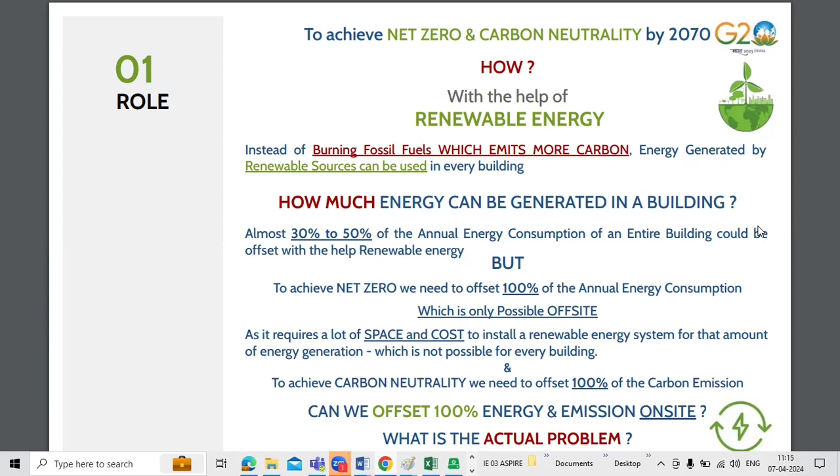To achieve carbon neutrality, we need to offset 100% of the carbon emission. Right, so achieving carbon neutrality means 100% of carbon emission needs to be offset. Can we offset 100%? Yes, we can offset 100%, but there are certain problems. And what are those problems? We can discuss that now.

Next. So how are buildings built today? There are n number of cases where architects have designed a building, and then somewhere during construction, the client or architect realizes, okay, let's go for green, let's go for green building technology, and then they intervene. They bring in green building consultants, asking to make this building a green building. This can be possible by using high performance systems or technologies.

But it is not possible to make that building a carbon neutral or carbon positive building, or a 100% carbon neutral building, because the systems alone can't help you make it net zero, though they will definitely reduce the energy consumption. But if the building envelope, the building roof, or the building orientation is poorly designed, automatically the energy demand is very high, and your energy consumption ends up being very high.

Say a building's EPI has gone from 100 to 150, and then you offset 80 - that's not a big deal. If you've designed a 100 EPI building and offset 80, that makes a huge difference. But if you've designed a bad building with EPI of 150, and you offset 70 or 80, that's not really the green approach.

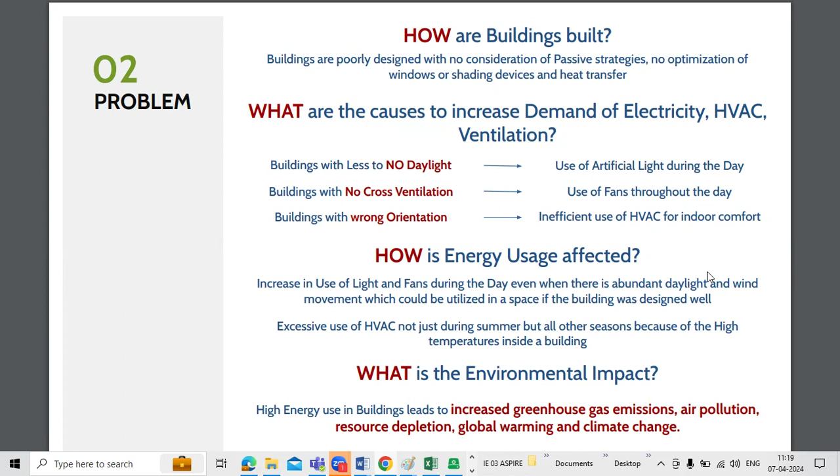Next, the solutions - there are very simple solutions which are graphically represented here, that can be easily introduced into the architectural design by an architect. But right now on this platform, I'm sure almost 90%, 95% of the audience are engineers.

So I will request you all - if you are working on any project, you should demand your architect that you need to go for passive design strategies first, and then let's optimize the energy and the systems. That will save a lot on sizing of the system as well as costing of the system.

So how should the building be designed to enhance the architectural design approach, by using passive architecture features? One extremely important factor is the orientation of the building. In our climatic context, the north and south surfaces receive very little radiation.

Whatever radiation falls on the north and south can be easily tackled through shading devices. However, the east and west facades are extremely difficult to tackle with solar radiation. Optimizing shading devices is also difficult on east and west facades, and the quantum of heat coming from east and west is also very high. So the orientation of the building itself plays a major role.

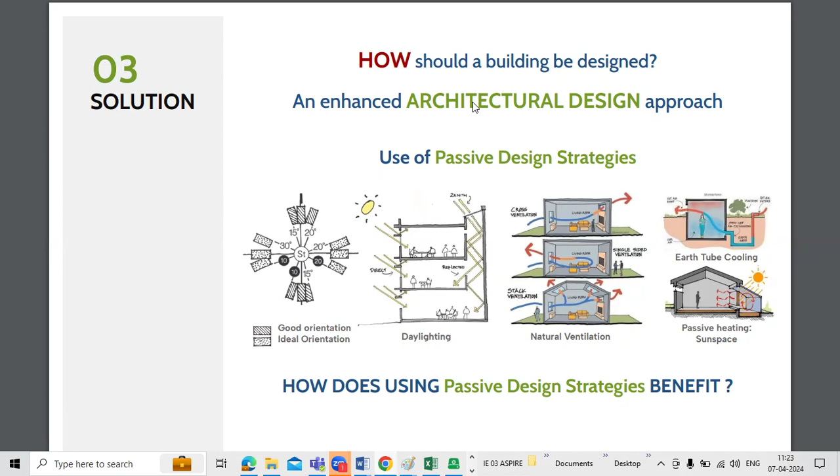And the passive heating and cooling systems, that's what we will talk about. That's the only approach to reduce your building energy demand 100%, by using passive strategies such as earth tube cooling systems and stack ventilation. Such strategies can be easily introduced.

So this is what we have already discussed - the building orientation, which refers to positioning of the site and considering the vegetation and the surrounding buildings. Surrounding buildings will also help you optimize the energy consumption. Second is the daylighting, what we have talked about.

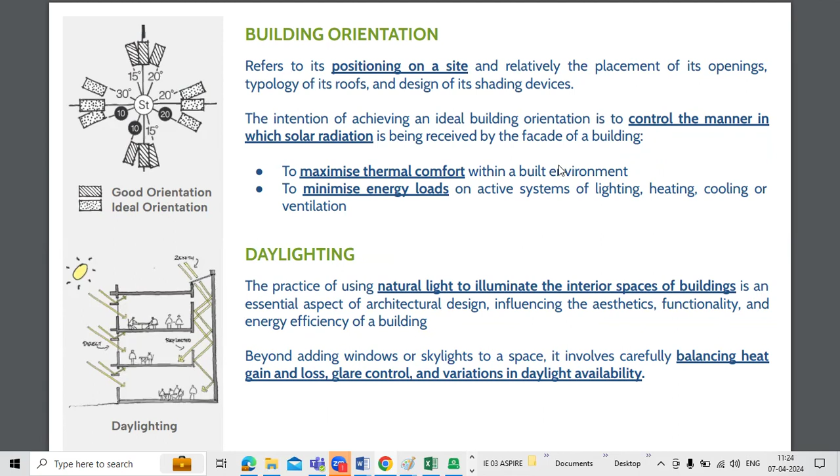Next, naturally ventilated we talked about, and then the passive heating and cooling system. This will play a major role because the word 'passive', that is naturally, uses the basic science of heat transfer, what we have learned in the smaller classes right from 7th, 8th standard. The principle of heat transfer plays a major role in meeting passive architectural buildings.

And I'm sadly saying this, that there is no syllabus of heat transfer in all our 5 years of architecture curriculum - we don't have heat transfer sessions in any of the subjects. I believe this is the most important thing for an architecture student to understand, at least with respect to ventilation, so that an architect can also reduce completely the energy demand of the building.

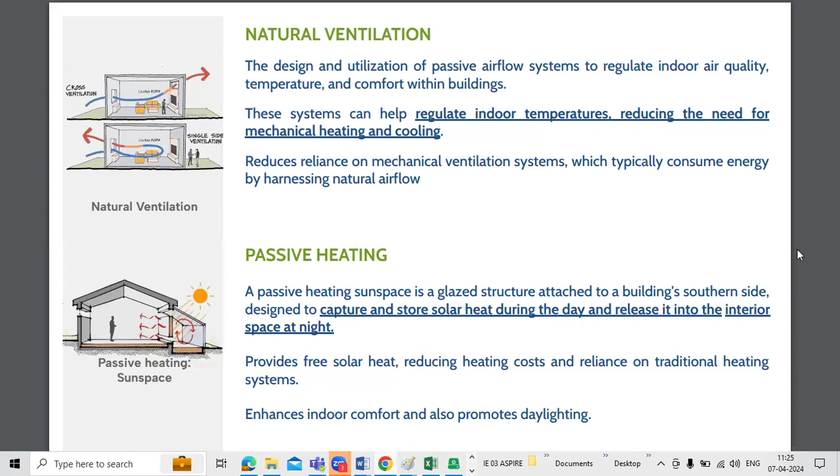So we talked about stack ventilation. This also plays a major role based on science. Stack ventilation is basically to remove all the hot air from your spaces. What we learned in seventh grade is that hot air rises up because of lesser density, and the cold air sinks.

Stack ventilation is nothing but a high level chimney from where you can remove all the hot air from your spaces, with the natural draft of cool breeze coming from the lower height windows. This is a creation of draft, and it works even where there's no breeze, an absolutely calm condition - stack ventilation will help create that draft of air inside your spaces. Just by understanding the basic principle of heat transfer, you can change entire spaces very positively.

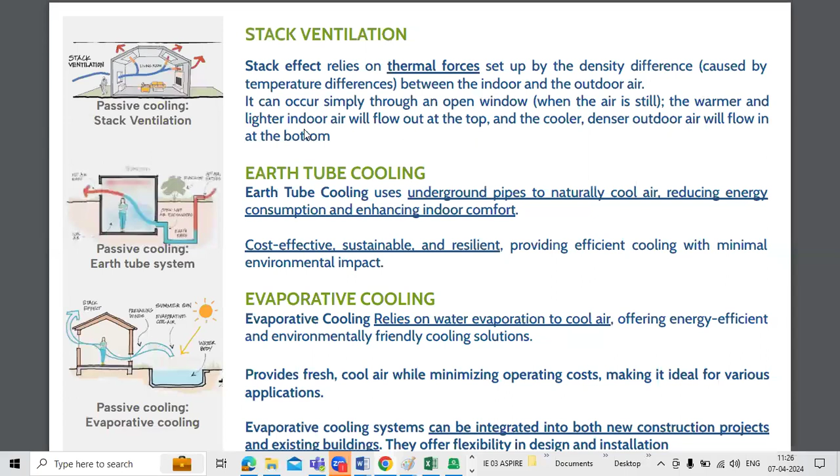Earth tube cooling system we will talk about in detail. Evaporative cooling system is also something we will discuss in detail.

Material selection - the building materials. I believe an extremely important part of any building design is the envelope of the building, which has walls, roof, and glass. These are the three major materials that most people really don't bother about. I'm sadly saying that 95% of architecture people practicing are all fascinated about the aesthetics and looks of the building, which is not wrong.

But if we add a little bit of science to it - again the principle of heat transfer, what material we are using, in what climatic condition, the site context - if we connect all these three things, then the building will run phenomenally. Because reducing heat transfer through the building envelope will help reduce directly 50 to 60% of your building energy demand. It reduces your building heat gain and directly reduces your cooling or heating demand.

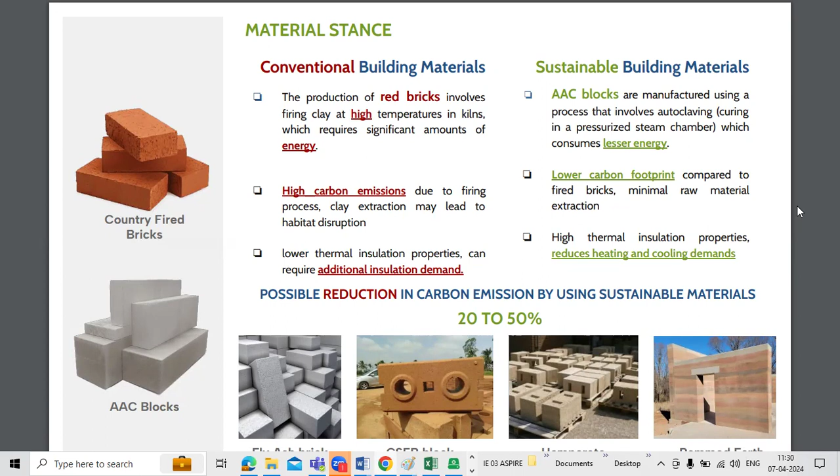Next. So what is the difference between a generally architectural practice design building and a passive architectural building? We can compare these two things.

The first one is the conventional building, let's say, relying heavily on mechanical heating and cooling systems. This conventional building directly has a huge dependency on the mechanical heating and cooling system. If it fails, the people in a glass building can't survive.

Just imagine a glass cube building in any Pune or Mumbai BKC area. The air conditioning system fails for 2 days. So the building won't run, it will completely shut. However, if you have a passively designed building, it doesn't require an air conditioning system.

So there is no such situation where the building may have to shut down for 2 or 3 days. The passively designed building will directly reduce your mechanical energy system sizing as well as the energy consumption. The second one is low performance windows, which contribute to heat loss in winters and heat gain in the building.

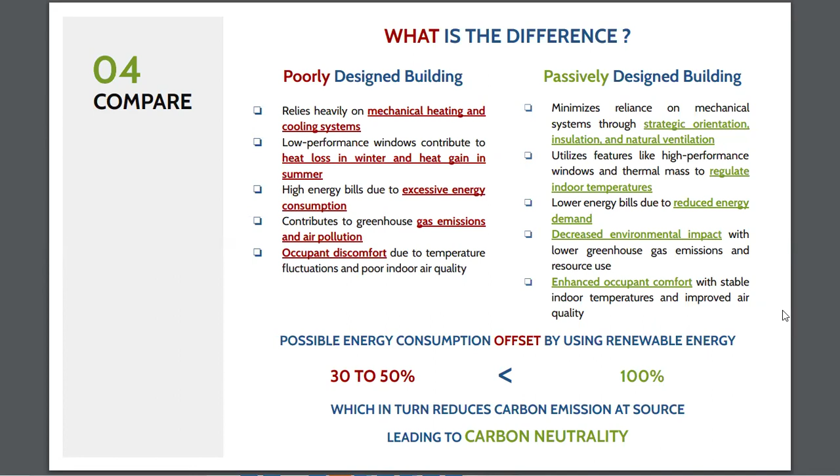Next. So, carbon negative.

There are steps to carbon negative. First there will be carbon neutral, then net zero, and then the carbon negative building. The approach to carbon negativity: step one is to be carbon neutral, where CO2 emissions from the built environment are completely absorbed by trees and plantation. Second, cutting down CO2 emission from burning fossil fuel by using renewable energy sources. Third, since CO2 emission is cut down, the CO2 absorption exceeds the generation rate. So if you are offsetting 100% of CO2 emissions, then the carbon negative building can be possible. These are the three ways which we will discuss in detail now.

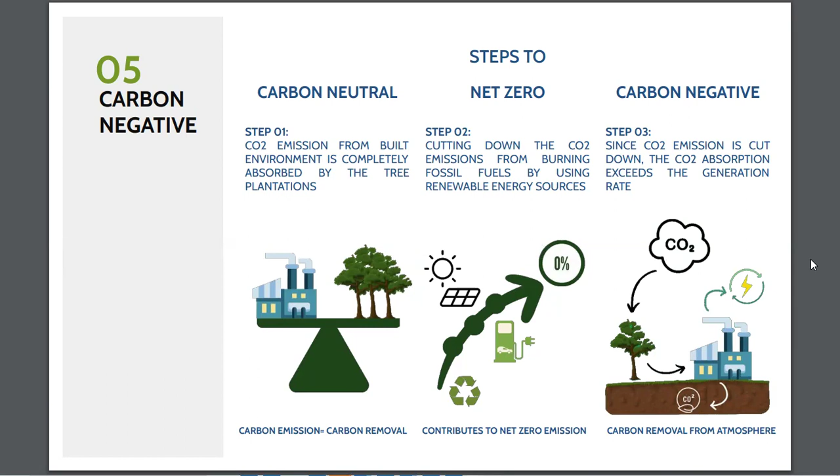Benefits: there are environmental, economical, and social benefits. Environmentally, you can reduce the CO2 emission, conserve natural resources, and mitigation of climate change can also be optimized or reduced by having such an approach.

Economical benefit: it reduces your energy bills and increases property value. If you are staying in a green building or carbon neutral building, the market value or prestige of that particular project boosts up, which helps builders increase the cost per square foot of that property. There's also potential for government incentives and rebates. The government has tremendous schemes and facilities for such buildings, which help get maximum benefits, rebates, and property tax benefits. You can save a lot on money.

And there are social benefits. It improves indoor air quality, enhances occupant comfort, and promotes sustainable living practices, which also helps maintain harmony in society. So these are the three benefits of carbon neutral building: environmental, economical, and social benefits.

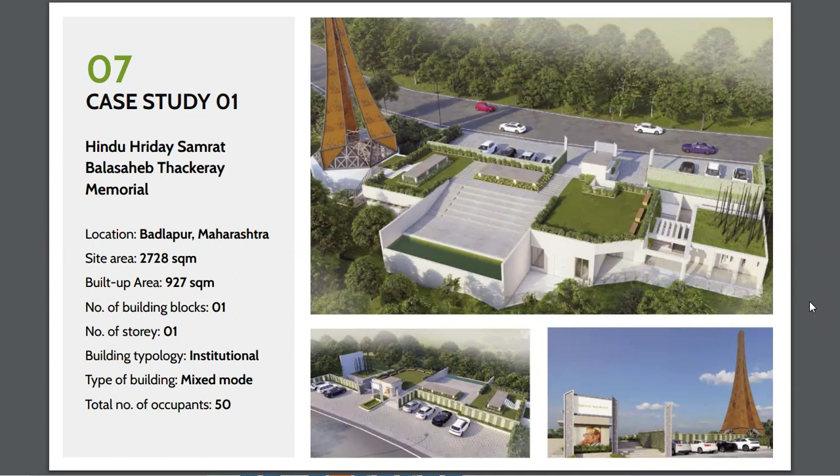The memorial's three towers symbolize the Shiv Sena and Balasaheb Thackeray's thoughts, with a different logic to it. Below the dome is a space for worship, where we have a 1:1 scale idol of Balasaheb Thackeray, beneath that dome and the three columns.

Next. If you can see the previous one, ma'am.

If you can see this, the structure is very small, whereas the gray shows the contours we have made, with smaller pathways across the entire contours, and a good amount of plantation has been done. There was a small, extremely small perennial stream flowing throughout all 12 months.

For so many years, the water was just flowing through the site into the Nala next to it. But now we have introduced three small check dams — you can see these three reservoirs marked here — which help.

These slow down the flow of water and help it percolate into the earth, while the same stored water is also used for the irrigation system across the entire 25 acres.

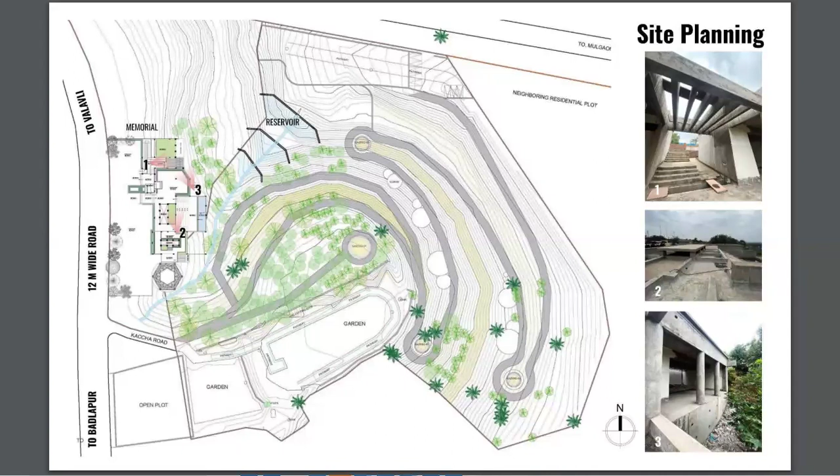That's not sufficient, but whatever water is available, we use it for irrigation. It's a matter of two to three years — once the trees mature and become self-sustainable for their own water demand, we won't need to water them. We're almost at that stage now, completing nearly three years on this tree plantation project.

So water now features as it flows through three steps, and what we're introducing now are completely lotus ponds — we are planting lotus in these three ponds.

On the previous slide, if you see image number 4 in the top right corner, you can see the site completely green, with the structure merged into the surrounding trees. Image 5 shows the entry to the building. The buildings below, which are 7-8 stories, are below your eye level, so the structure sits at a very high level.

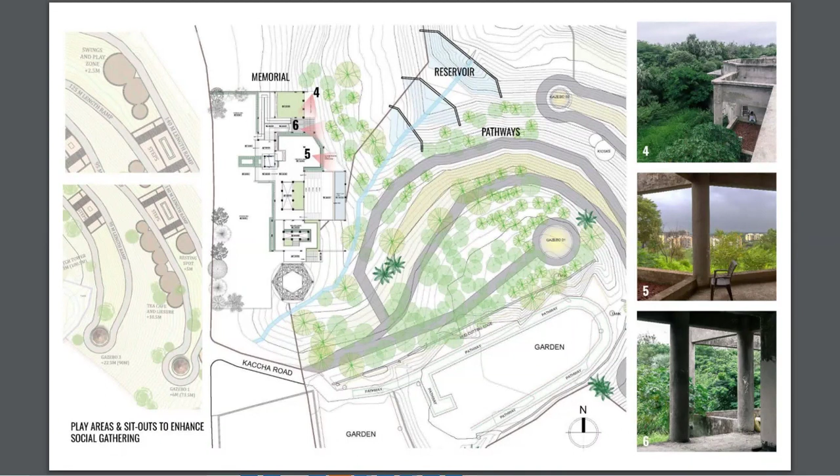In the section, you can see the structure is completely earth-bermed, and the use of contours plays an extreme role without cutting any trees. This use of contours helps meet all the passive design requirements, reducing heat while staying in harmony with nature.

We have also introduced small skylights in the art galleries. In the section, there are two skylights that bring in diffuse daylighting from the sideways rather than from the horizontal surface. We've included pictures of those rooms in the coming slides.

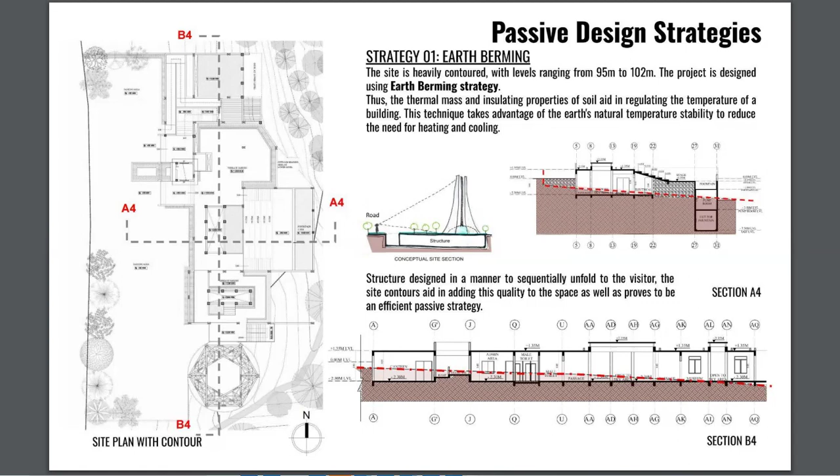This section shows the light coming inside, shown in yellow. The light comes from the skylights, which are side lights from the roof.

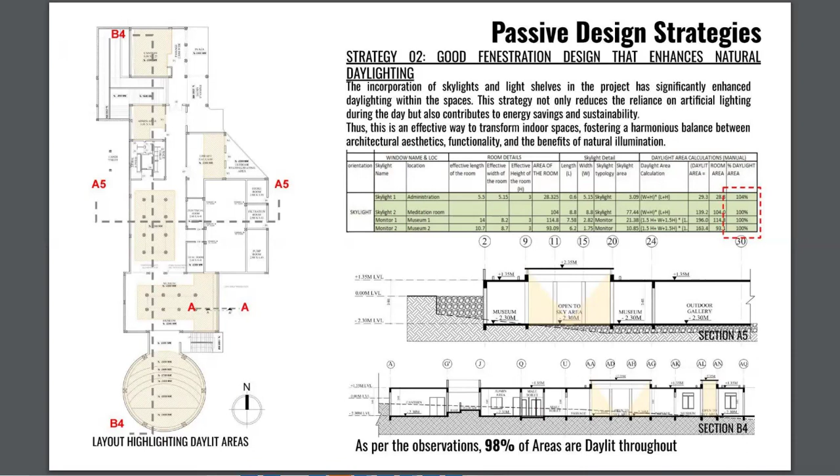Right now, without the light shelf, the light doesn't even reach 40% of the room, but we're in the process of installing the light shelf, which reflects and bounces light toward the deeper spaces of the room. Such small strategies help reduce energy demand.

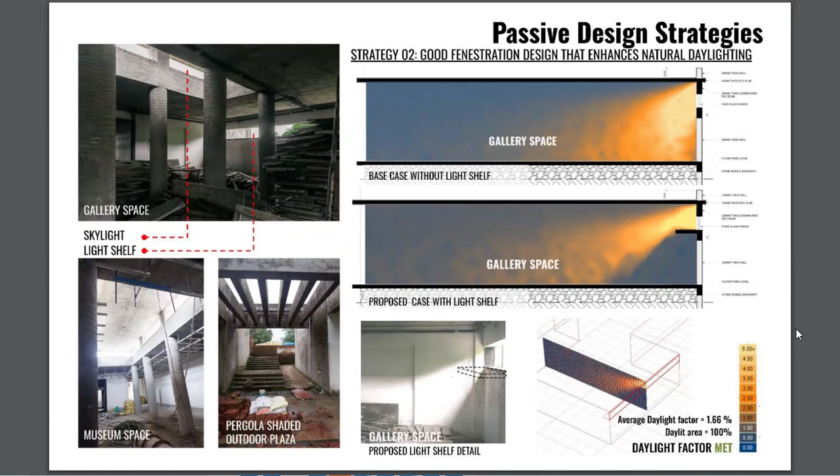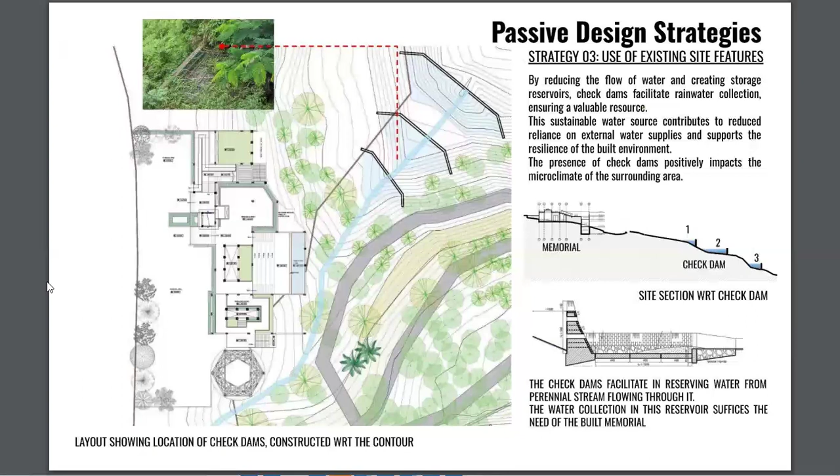Energy efficiency, yes, we have used the LED system and cassette air conditioning system for the space because of the small scale of the project. We have used cassette system for all the spaces which are art galleries, libraries, office spaces, canteen, and the prayer hall, and there's a small AV room as well.

With the help of the design itself, we have reduced almost 66% of the heat gain just by correct placement of the structure as well as by doing earth berming. We have reduced 66% of heat gain, and also 66% of the energy consumption from the base case has been reduced by using renewable energy as well as proper efficient systems.

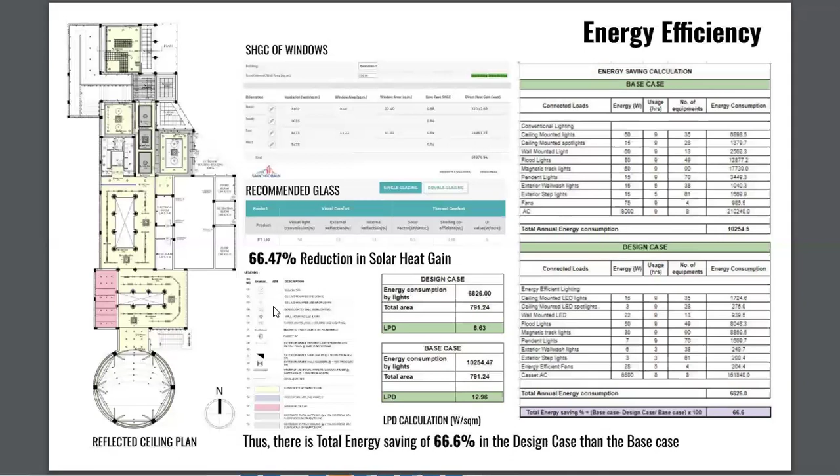As per GRIHA requirements, we are using 2 kilowatts of solar panels towards the northern side of the site. We have placed the solar panel there because on the south side we have a tower, so we don't want to cast a shadow on the panels. So we placed the panels towards the north side, facing the southern slope. This installation of solar panels is reducing our demand by almost 98-99% of the building demand.

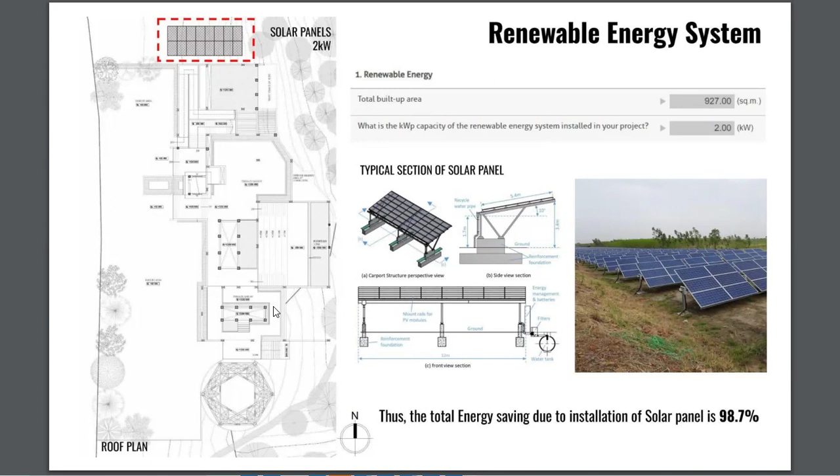We inverted the beams so that we can reduce the cost of the false ceiling and reduce the height of the building needed. So what we did, we inverted all the beams, and to maintain the waterproofing for the landscape and everything, we put in inverted earthen pots, then filled with AAC blocks, then screeded with cement, and the flat roof is achieved. So we have an air cavity in between the roof section itself.

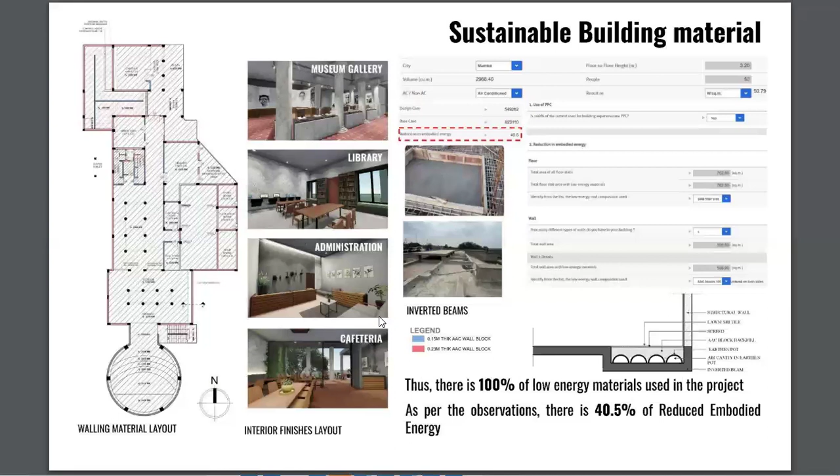Water, yes, we have the stream itself. All the low flow fixtures are used in the building. STP has been introduced, but we are not recycling and reusing that water because we are meeting the demand of the building, and it is not financially viable to use STP for such a small building where we are not generating a handsome amount of water to run the STP.

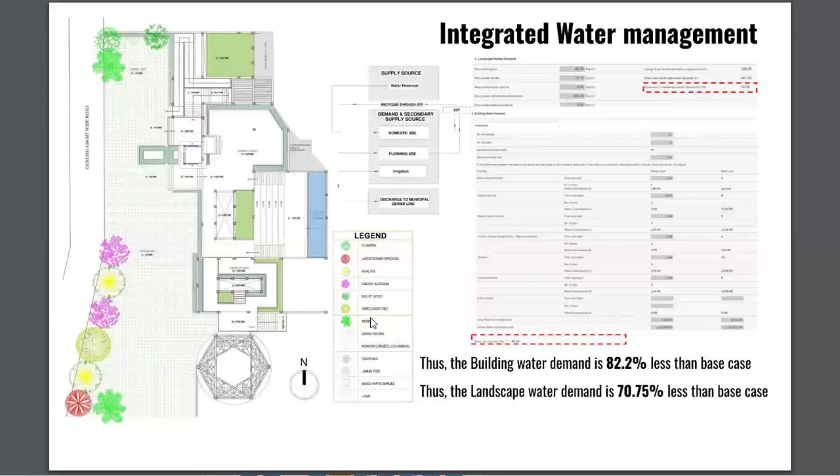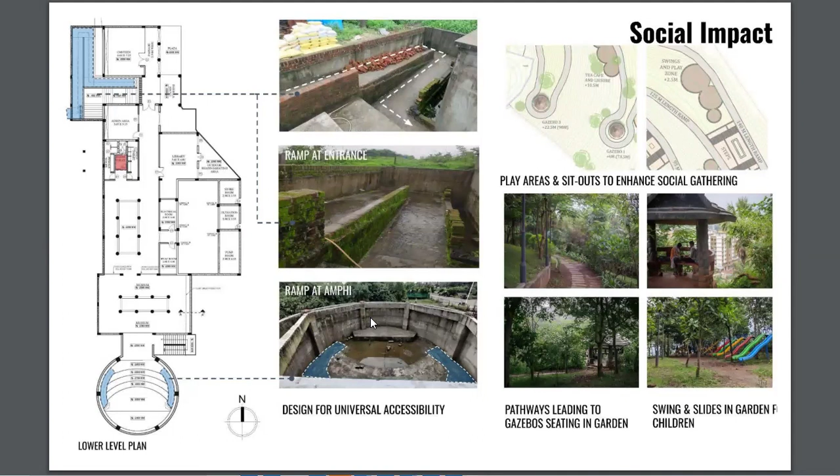Socially, yes, we need to think about the social parameters as well. So for people who are differently abled, we have all the ramps provided to reach all the spaces. Then we have toilets for differently abled people. We have gazebos for small kids, a garden area, gazebos for senior citizens, and a pathway which is completely without any step, so senior citizens can directly walk, or a wheelchair can also go on. These are the small initiatives we had taken.

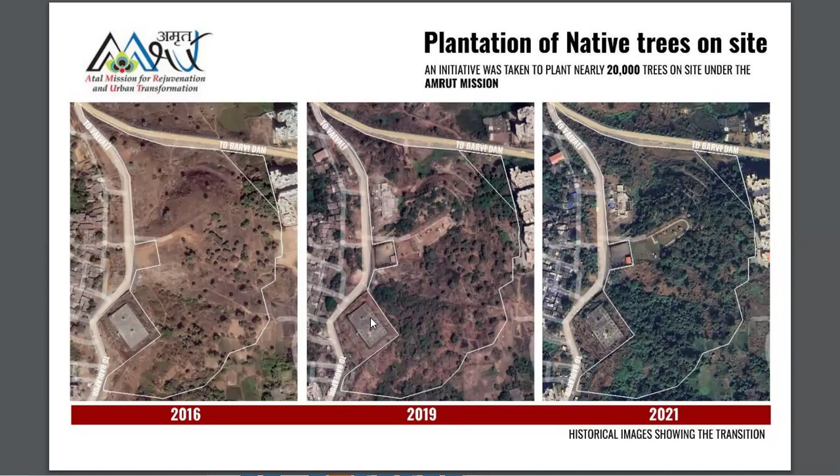Under the AMRUT mission, we planted 20,000 local native trees, which attract birds and different insects. So the whole biodiversity has been created, and this just happened without any specific thought process at first. We just thought we needed to introduce more trees, and make this like a breathing lung for the city, which gives a good amount of oxygen. But then for the competition purpose, we thought of calculating the CO2 emission done by the building and the oxygen produced by the trees.

What we have achieved is that we are producing almost one-fifth of the carbon emission and almost six times more oxygen. The entire calculation I've done shows we have achieved six times - so 100% of carbon emission is absorbed, and six times the oxygen is being produced. That's what we have achieved in this building by planting so many trees.

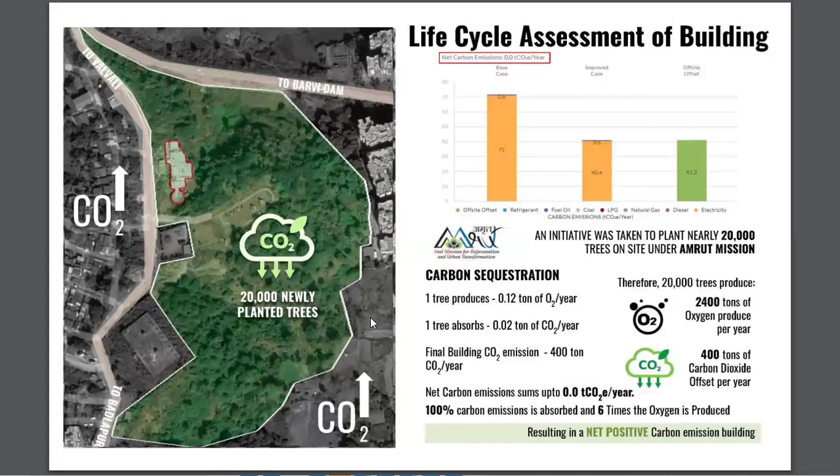So this building is carbon neutral because the trees we have planted are absorbing 100% of the CO2 and producing more oxygen than what the building is producing as CO2. This happened just because of the space available and the efficient use of that space.

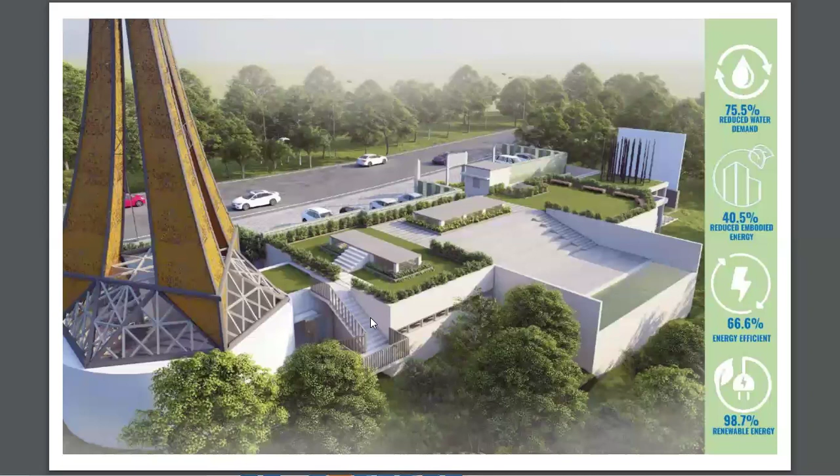It wasn't just the architect's thought - even the bureaucrats and the local authority, all the COs, everyone was very keen to have this project at a national level. This project got the national award last year at the GRIHA Summit as the best passive architectural design among almost 100 entries - 78 or 100 entries were there. Among all those entries, this building got first place.

Just hold on, I need to plug in my charger.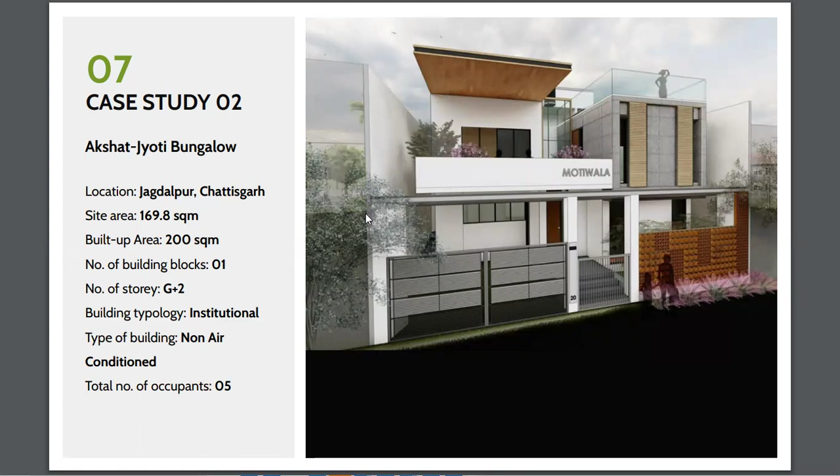The orientation of the building, as I mentioned earlier, plays a major role. The building is oriented as per the site context, with most of the windows facing north, and east is the main facade. We have very small slit windows punctured inside box windows, and the major part of the east facade is covered with the car parking, porch and buffer spaces. On the north side, there is a skylight and two turbo fans. That's how the entire structure has been oriented.

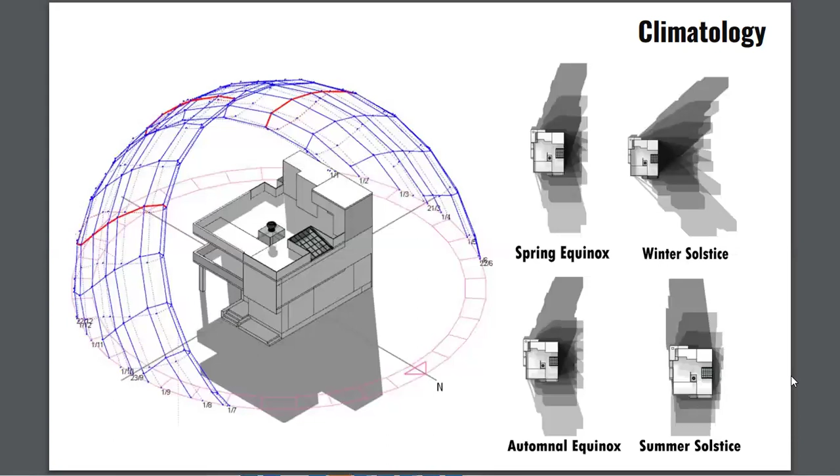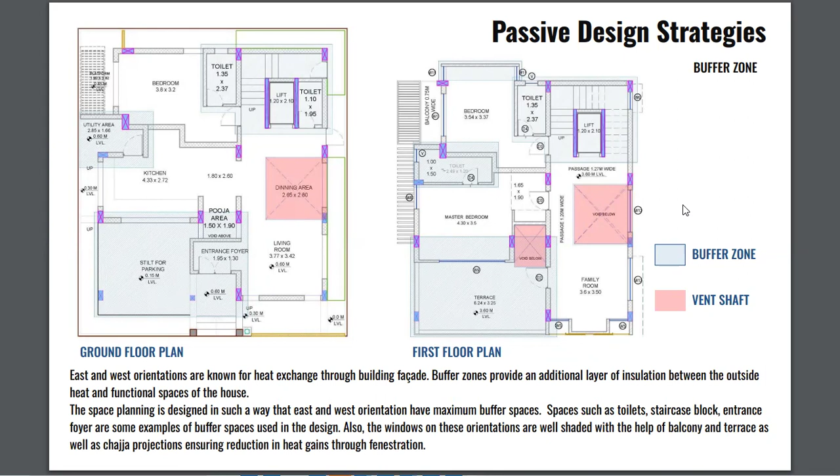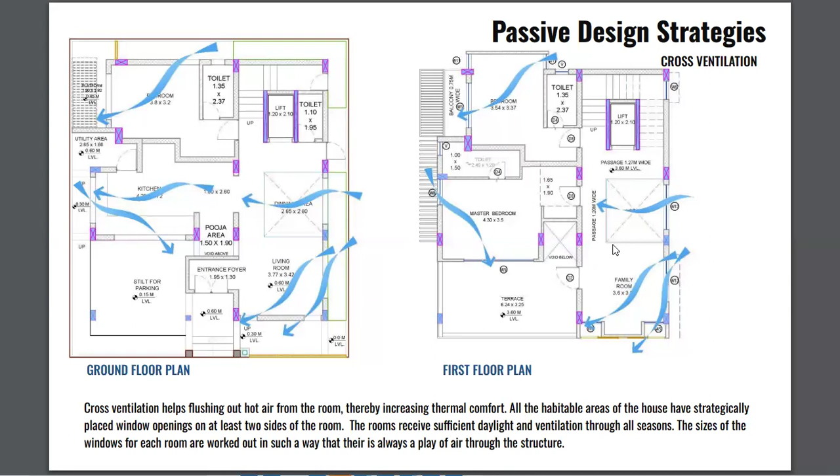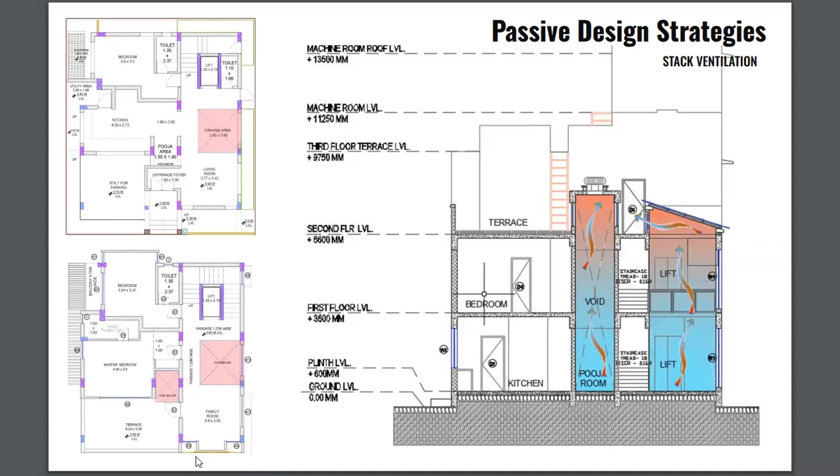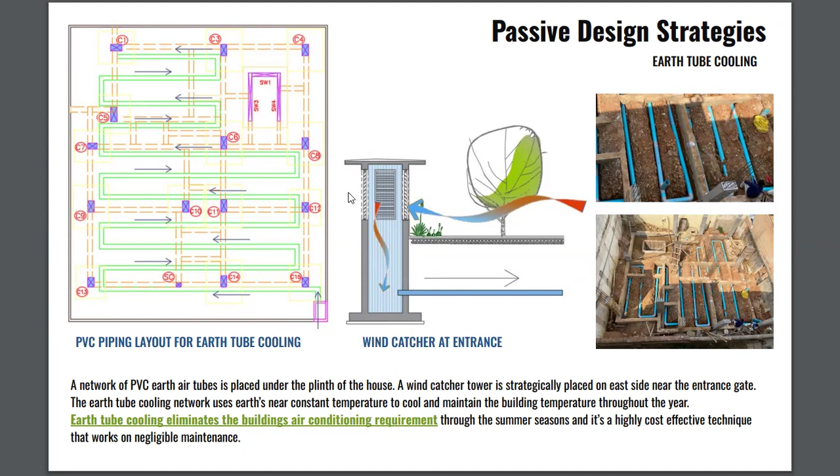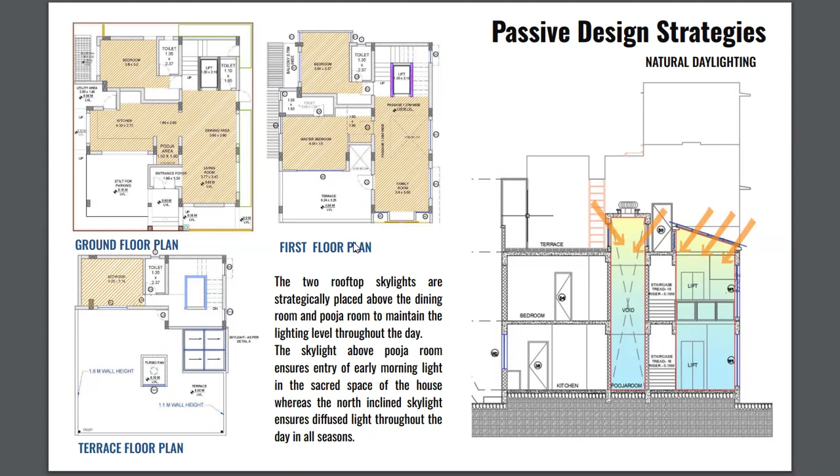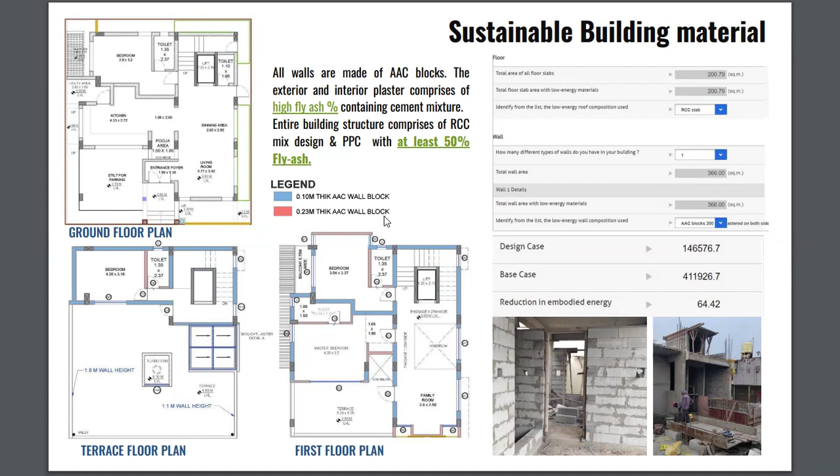Whatever material we have used in this house is all IGBC or GRIHA certified material, right from flooring, walling materials, glass, plywood, any adhesive or sealants, anything. Out of all the 100-200 materials used in this building, every single material is certified, which is environmentally beneficial.

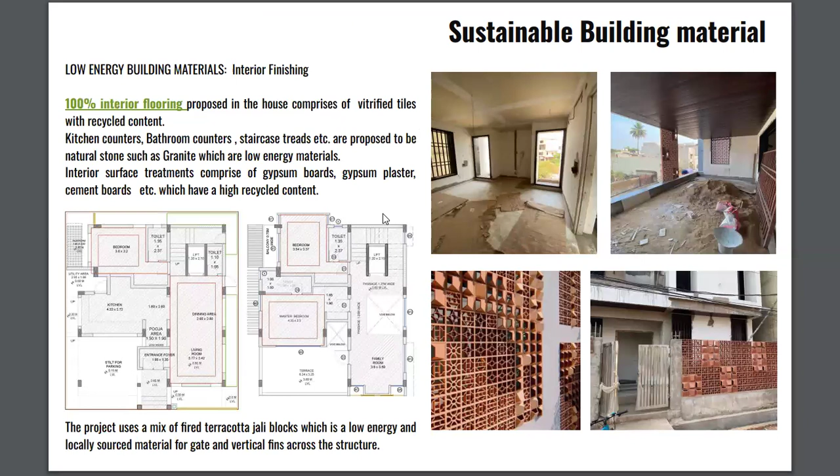So almost 78% of water demand is being reduced, and 65% of embodied energy, which is through the building materials, is being reduced.

The house has solar panels. Initially we calculated that 70% energy efficiency is being used, and 89 to 90% of renewable energy is offsetting the entire energy consumption. So almost 90% of the energy demand is supplied through renewable energy. This 70% reduction in energy consumption helps us optimize the costing and sizing of the renewable energy, which is why we're able to offset 90% through renewable energy.

If the energy demand was hardly 10-20% reduced, then the same kV of solar panels would have just met 40-50% of the energy demand. So by using all the passive features, first you reduce your building's energy demand, and then automatically your renewable energy sizing will reduce.

In a previous project we stopped somewhere around 97-98% of renewable energy; in this project also we stopped around 80-90%. This is to optimize the sizing and investment for renewable energy - we're not meeting 100% in either case. My approach is that you should not oversize the renewable energy, because in months where we produce more renewable energy, net metering is one solution, but to optimize cost, I always stop somewhere around 90-95%. This is what I believe.